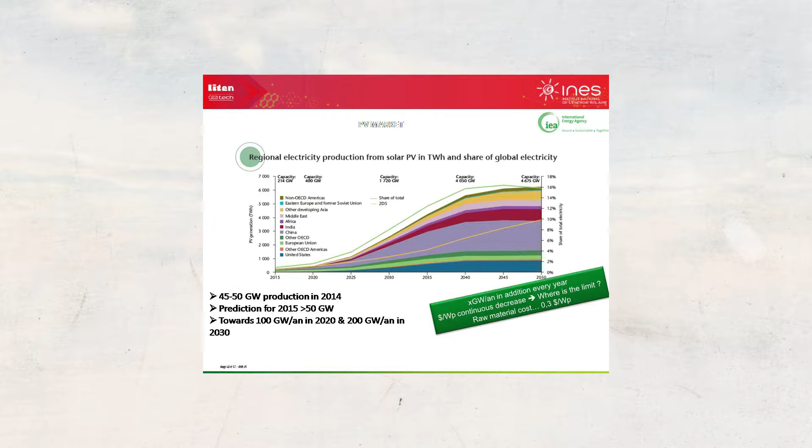So I have also to say that IEA has been so far very pessimistic, always expecting less than what has been achieved really on the field so far. So we have very interesting years in front of us. PV will still increase very much. And it has also been said in the IRENA publication this year.

The Agora and Fraunhofer study show that after PV now has achieved a price in the range of 5 to 6 cents per kilowatt hour, it will be everywhere below 5, and the range for the year 2050 will be 2 to 4 cents per kilowatt hour everywhere in the world. And even the Deutsche Bank is claiming that now it's time to invest there.

So I'm coming from CEA INES. A few slides just to present quickly what we are doing. We are part of a big research organization previously completely involved in nuclear, but 25 years ago they started some research on non-nuclear energy, on technological research, on microelectronics, big data, software, and new technology for energy. And that was the LITEN Institute in which we are working now.

This LITEN Institute is completely dedicated to new technology for energy. We are addressing organic electronics, nanomaterial, biomass, hydrogen, electric transportation, and solar technology. And INES gathers these topics. Here we are 1,000 people working with a budget of 150 million euros.

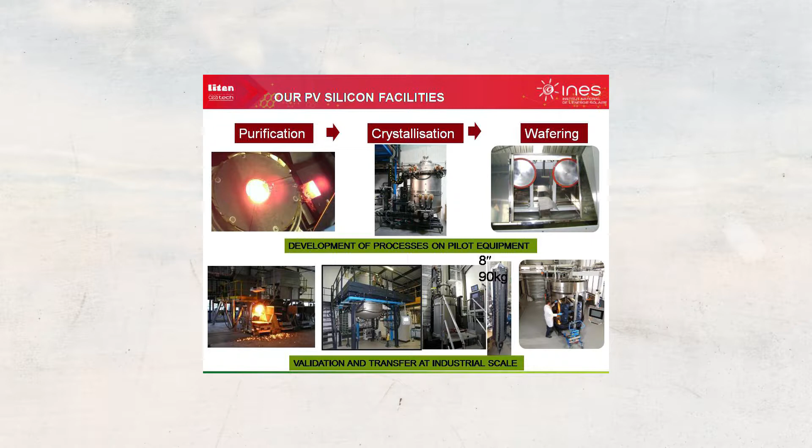You know that multicrystalline silicon is cheap, but is not so efficient. Single crystal Czochralski wafers are highly efficient, are more efficient, but they are also more expensive. And we have been trying over the last 4 or 5 years to develop what we call the mono-like, gathering the advantages of both worlds, of both paths, trying to get at the same time a cheap product and a highly efficient product. And this was developed with the ECM Greentech company.

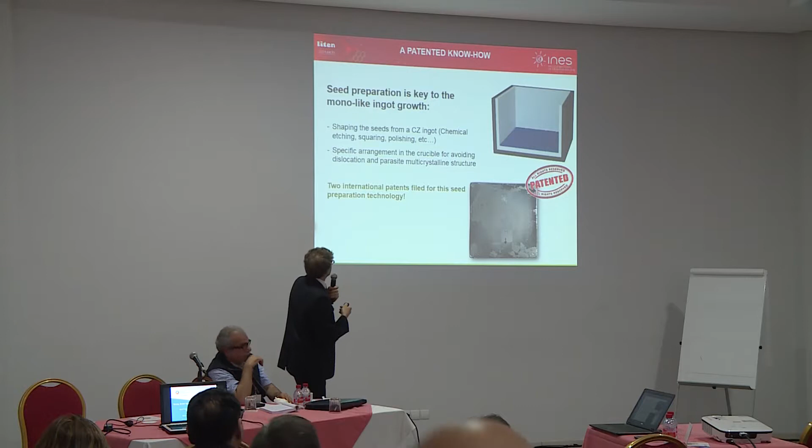And we have been working on all the steps of the process, melting and crystallization. And all this innovation is dealing with the implementation of seeds at the bottom of the crucible. And we have been developing patents on that. And you see, once you grow the silicon, you still see the shape of all the seeds on the front surface of the ingot. So 25 centimeters later, I would say, or higher, you still see all the squares from the seeds that you had at the bottom.

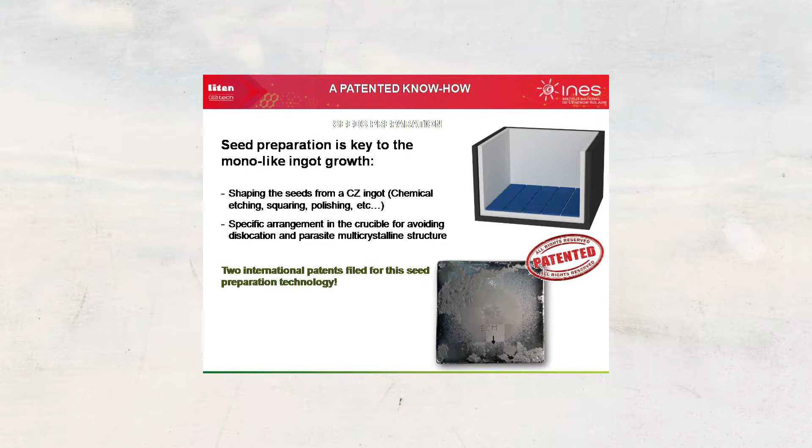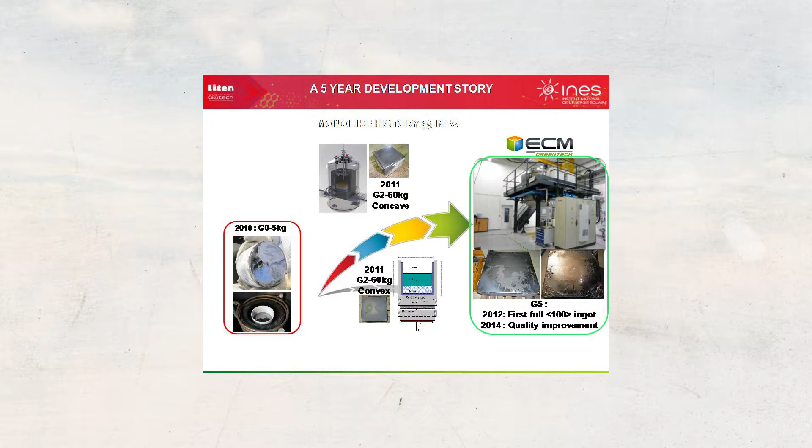For this, we have been working quite a lot. We started on a small size ingot in 2010. Then we reached what we call generation number 2 with 60 kilogram ingot. And then last year, we reached generation 5, and we worked quite a lot on the quality improvement of the material, impurity content, oxygen content, etc.

What is important is to look at the seed preparation. You can start with small seeds from 8 inches Czochralski ingots, or this large, 16 inches Czochralski ingot. For big crucibles, you need only 9 seeds instead of 25 small seeds. Or, that's another way that we are going to develop, is to use a slice of the previous ingot.

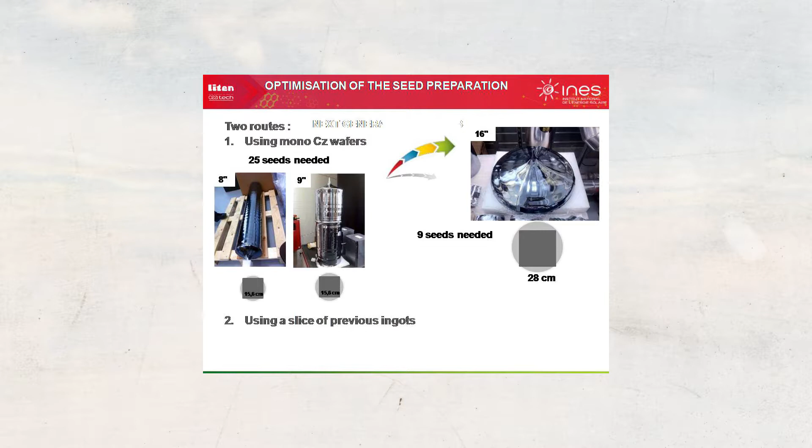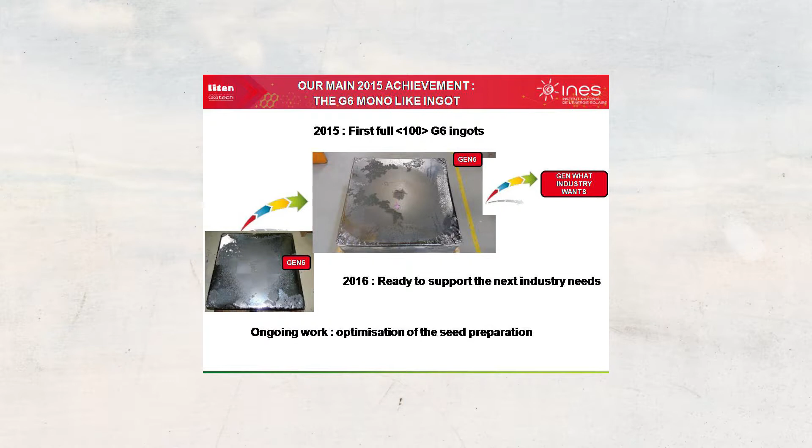And we are ready to go on with generation number 7 or 8. It will be still bigger furnaces and bigger blocks of silicon to always increase the capacity of the equipment. This is the result, and here you may see, it's not so much visible, but you still see the orientation of each of the initial seeds which were put at the bottom.

We also work on getting the wafer, but I will not detail too much. Here we work on the optimization of the diamond shape, which are covering the wire, the diamond wire. And the key issue is to decrease the diameter of the wire, and to optimize the implementation of the diamond, and especially the shape of the diamond and the way to fix them on the wire.

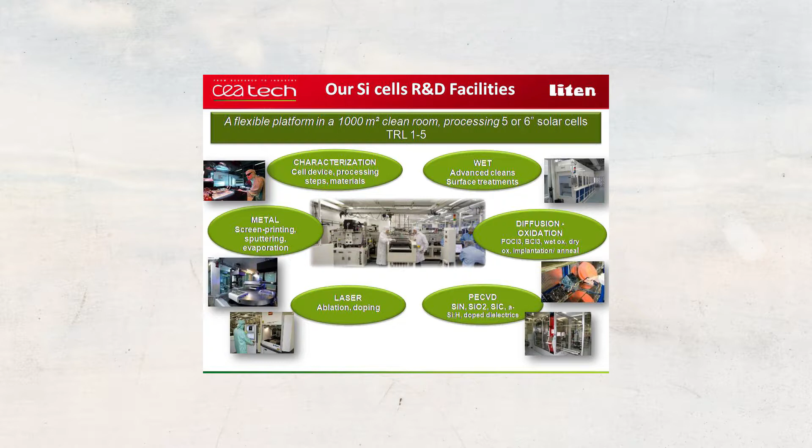At the cell level, what are the advances? Here is a quick description of our facility, of our labs. We have most of the equipment to cover all the processing steps for characterization, etc., diffusion, oxidation, PECVD. We are able to have some laser processing and so on. So this is our clean room for lab development. And here is our pilot line.

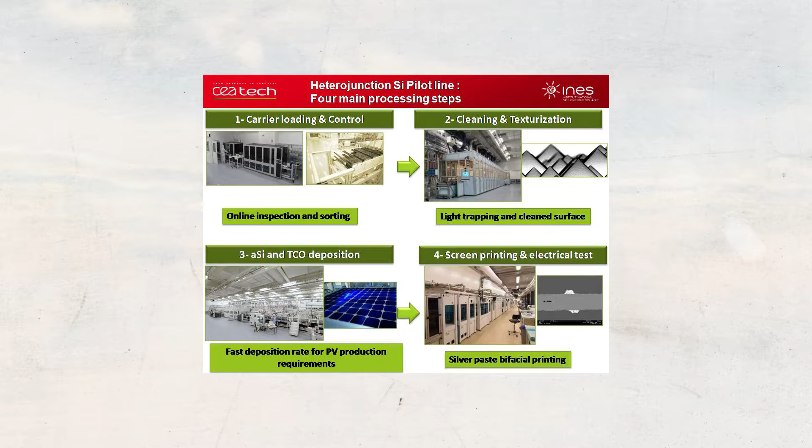It's in another building in which we have a huge pilot line, 80 meters long, to really check all the R&D advances at the pilot line level with a capacity of 1,100 wafers an hour. And on this line, we have all these processing steps. First, the wafer inspection. Second, in some wet benches, cleaning and texturization of the surface. Then the aSi, amorphous silicon and TCO deposition, and then the screen printing.

So what are we achieving with all these facilities? For conventional solar cells, we have the conventional process, aluminum BSF, or the PERC, in which we reach usually 19 to 20%. It's really the baseline process that we use to compare various types of material, various types of solar cells. With the PERC process, which gives bifacial cells, so far we reached 20.3%, trying to go this year towards 21%.

And we work also on the IBC, interdigitated back contact heterojunction solar cells, with which now we can achieve 20%, but you know that some research has been done by Panasonic and Sharp, and we can reach 25% with this process. But we are focusing on how to do the industrialization of this process. The heterojunction, that's our key issue that we are developing. So these are all the processes. I'm not going to detail everything.

Once again, the cleaning, the PECVD deposition of amorphous silicon, the PVD for the TCO, the ITO on the front and the back, and then the screen printing. We are aiming at 24% at the research level. Now, when we go through our industrial pilot line, so far we are above 21% with the busbar, and if we use busbarless cells using the smart wire technology afterwards, we are above 22%. That's the average in production within our pilot line.

And what are the best results we got so far? It's 22.2% on the conventional process, and 22.8% without any silver. Replacing the silver with copper plating, we can reach 22.8%.

Cell is not enough. You need to have some module to protect them. And here, again, we have a full building dedicated to the module design and manufacturing. We have also specific equipment for the cell interconnection, I would say classical, conventional soldering, but also gluing, and all the testing equipment and characterization equipment.

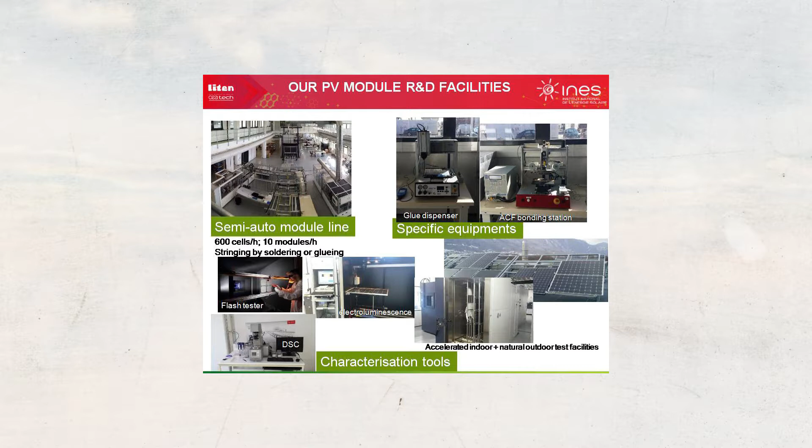Of course, we are not producing conventional PV modules. We are always trying to develop new functionalities or new products, so we can deliver any type of small module with 1 cell, with 4 cells, or of course with 60 cells. But we are mainly using this facility to develop any type of PV module, and it goes from lightweight module, flexible module, bifacial module, using specific material, trying, for instance, to replace glass with other polymeric materials.

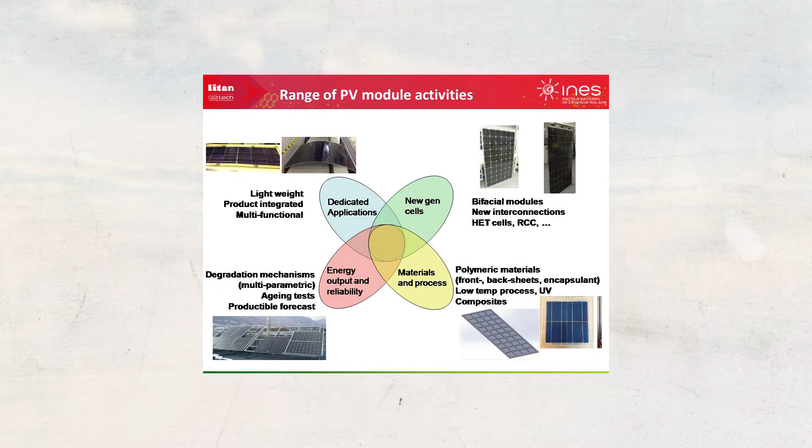We have some basic activity, like understanding all the degradation mechanisms. So this is covering all the activity we are having on PV modules. And these are some examples of what we are delivering. A very lightweight module with polymer injection. In fact, I forgot to say that we are really working hard on decreasing the time for the encapsulation. In a conventional process, you require 15 to 20 minutes for encapsulating a PV module, and we're really aiming at decreasing this time to less than 1 minute with some specific material, of course.

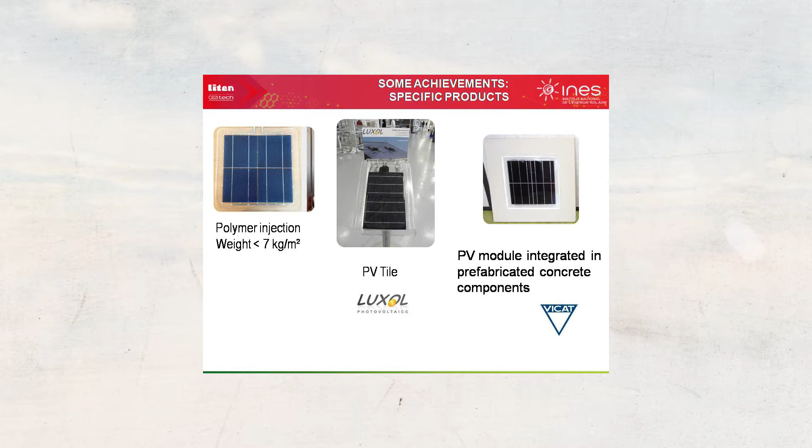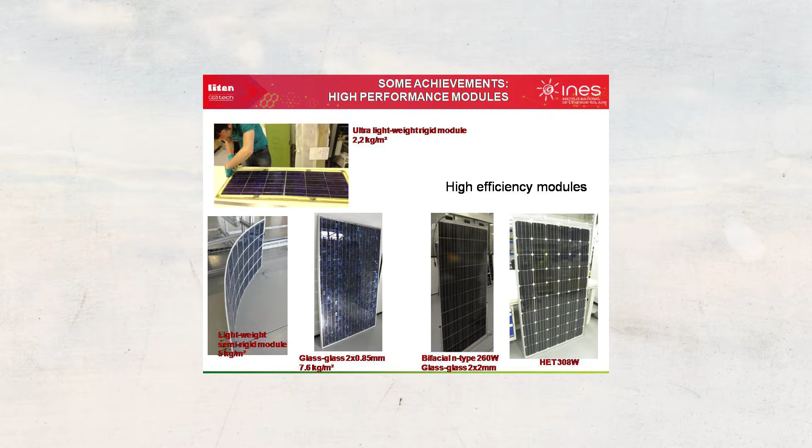We are looking at the integration in PV tiles, in PV prefabricated concrete components for cladding. As an ultra lightweight module, we have reached 2.2, almost 2 kilograms per square meter with a specific material. It could be very useful to refurbish old buildings without having to change or refurbish the structure. So these are some examples of what we are doing, and of course, the one using heterojunction solar cells, which are bifacial glass-glass modules, which give this result.

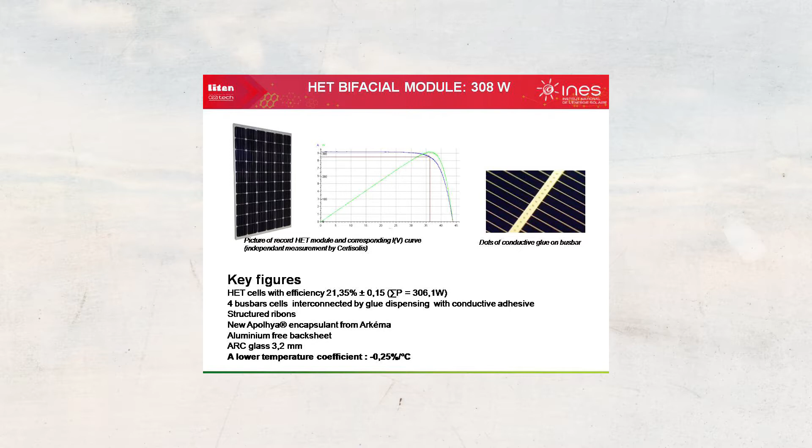What is interesting using heterojunction solar cells is you get a lower temperature coefficient, which means at the same peak power, higher energy output in high temperature regions, which may be interesting, for instance, here. This is what we are looking at. With bifacial PV modules, you see that what is at the bottom, at the back of the PV module is important. Whether it is black or white, you get a different albedo. So usually we can find 15 to 25% gain, more energy output. Of course, it's depending on the way everything is installed.

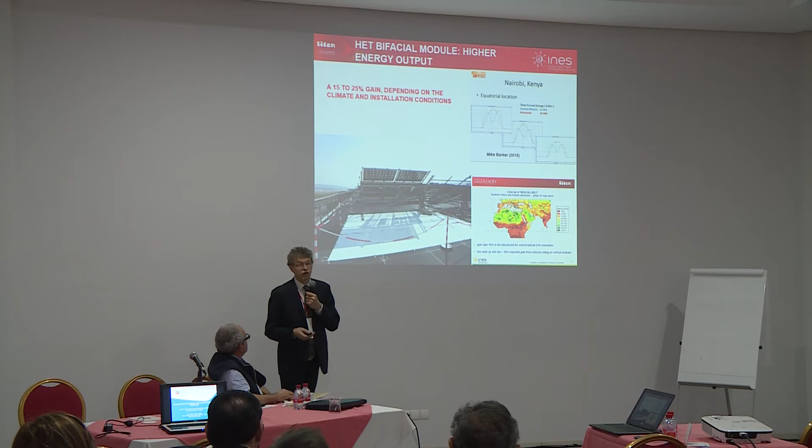And you can also think of new designs of PV installation. You can even put them vertical, north-south, and then instead of the usual shape, you get this shape, almost like a camel instead of a dromedary. And you get, at the end of the day, almost the same amount of energy, not the same shape of production, of course, sometimes less, but sometimes more. And we have performed this study, especially in this region, with modules installed vertical, north-south, so being illuminated mainly in the morning and mainly in the evening. It could be interesting also from the dust point of view.

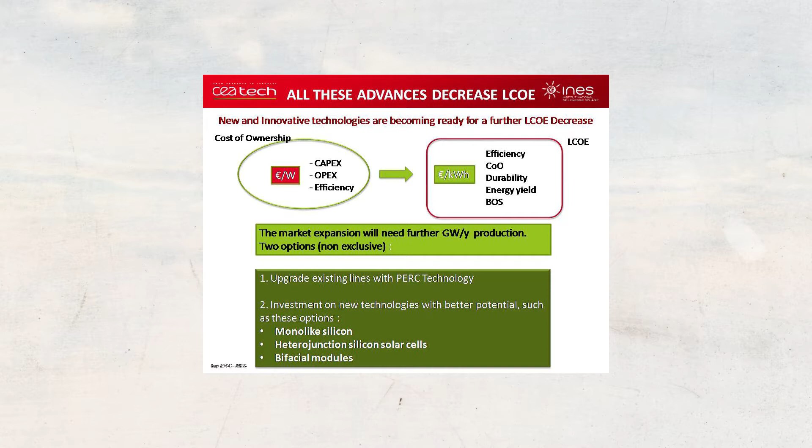So you see all these improvements are all looking at decreasing the LCOE, which is the most important figure. And of course, there are a lot of existing lines being refurbished to go from the aluminum BSF process to the PERC process. But we think that all these advances, which are just on the market now, with monolike silicon, with heterojunction solar cells, and with bifacial modules, are really another way to push forward to decrease again the cost of PV electricity.

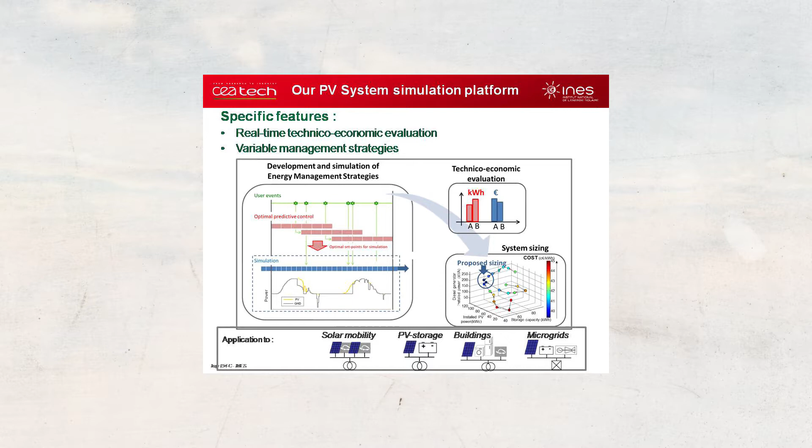And at any time, you have to take the decision: is it better to consume it now, to use it later, to store it, to discharge the storage system? And this, you can decide to do it anytime. So anytime you need to decide what is going to be your strategy for managing the electricity for the next 15 minutes, for the next hour, and what are you planning for the next hours.

So we have been developing this module, and of course it can be applied to solar mobility, to PV storage, to grid-connected PV in small grids or in buildings, in which you can always manage your energy demand. We will see this application a little bit later. For instance, what is important to increase the value, but also to decrease the operating cost of PV plants, is to simplify the troubleshooting.

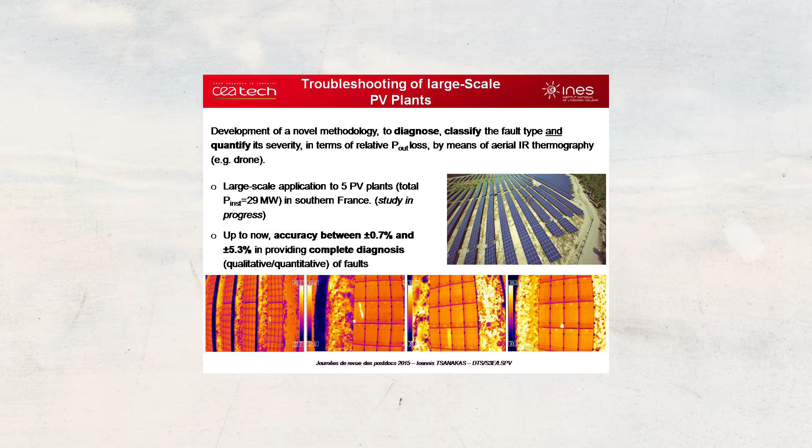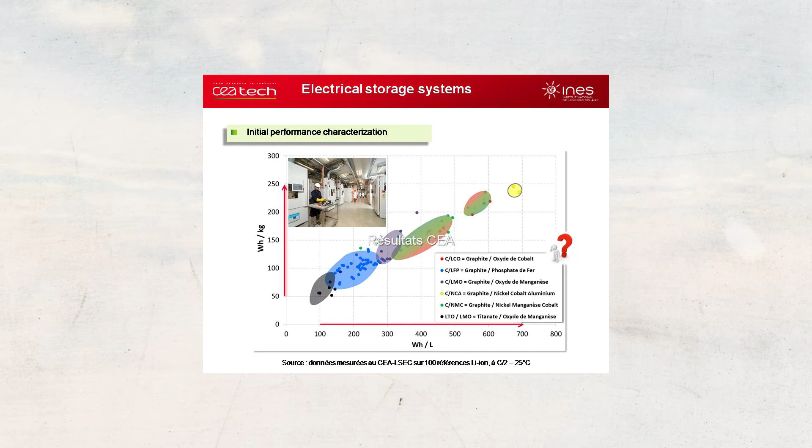Okay, 3 minutes. For storage systems, it's important to select the right technology. We have been comparing many storage technologies, and of course, they are not all behaving the same. Regarding the initial characteristics, the cycling capacity, the calendar aging, you see big differences. These are all lithium-ion batteries, but with different chemistry inside. And it's important to know what we are aiming at.

And if we are doing all this, it is to have at any time a very accurate idea of what is the state of charge, the state of health, and what should be the best managing strategy. So in order to use electricity in your PV system, it's important to know at any time if it's going to cost you to store electricity and then to discharge the storage system. Will it cost you more, or will you gain more by doing this?

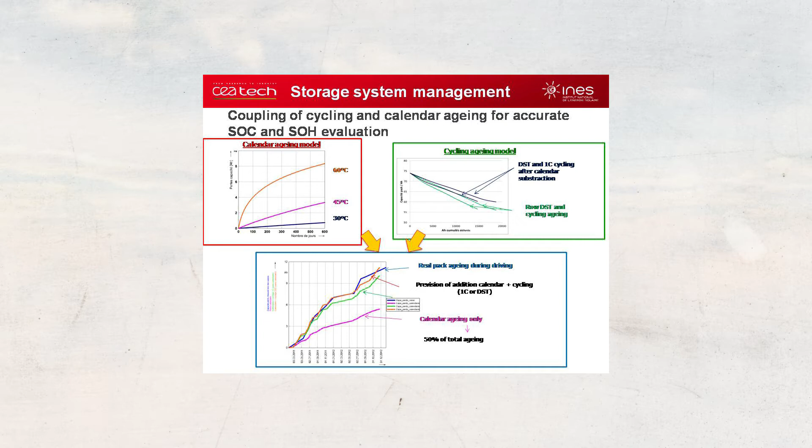At any time, you have to balance to make your decision, whether it is better to sell the electricity, to use it now, or to store, to use your battery. But then you will have a higher value for electricity later. So you have to know a lot about your storage system.

Last application, and a very interesting application, is transportation. So I mean electric vehicles being recharged with PV. And what is important is that one single square meter gives you enough power to drive 1,000 kilometers a year, which means that a parking lot of 15 square meters, 3 by 4, 3 by 5, or 3 by 6, gives you 15 to 18,000 kilometers a year, which is the average use of any car.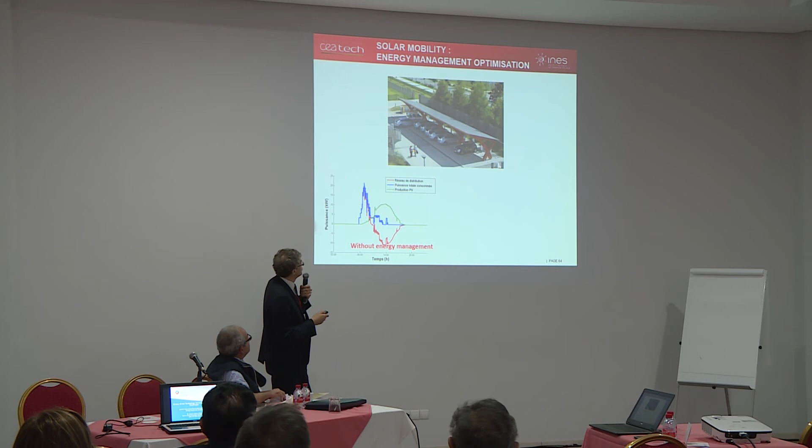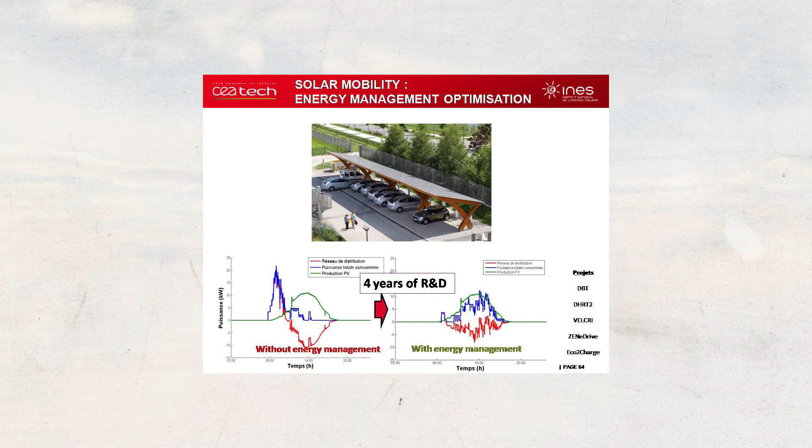And these are figures from Chambéry, France. Here in Morocco, or especially in Marrakesh, it will be around 1,500 kilometers a year per square meter. So this is much more efficient than any biofuel plus conventional car. To do it, we have done this managing strategy. Without managing strategy, when you have 10 cars arriving in the morning, you have a big peak of demand on your network, and it's not so good. But if you manage it well, you can do this.

How? So you have all the cars arriving in the morning which want to be recharged. So you have a use of solar only for a day in which only 20 or 25% of your energy is coming from solar, because the peak of solar is at noon. If you can anticipate and delay the battery recharge, you can reach this solar fraction. We do it like that.

You see all the recharge stations, station 1, station 2, and you will decide this car has to be available at noon or at 1 p.m., so it will be recharged first. But this one is not going to be used before 16, so it will be recharged last. And you can manage your demand like that. You can have many strategies. So for the one to increase the solar fraction, you will do this.

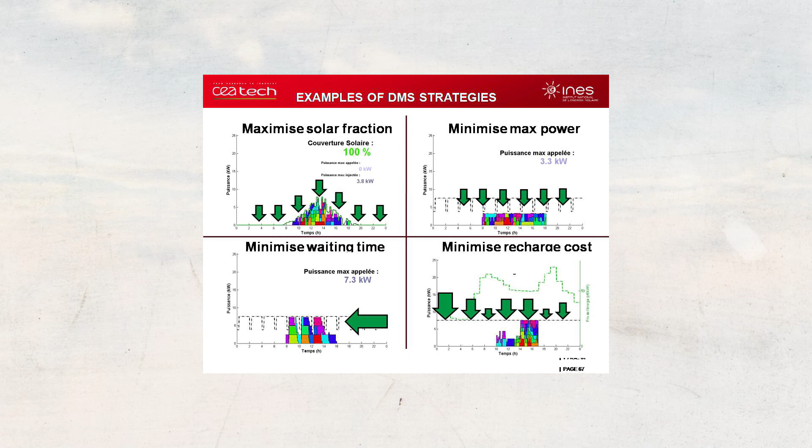You can minimize the max power supplied by the grid, and you will manage it like that. And you can manage it anyway, depending if you have different tariffs on your grid, you manage it in a different way. That's a way of managing electricity. I will skip this last one.

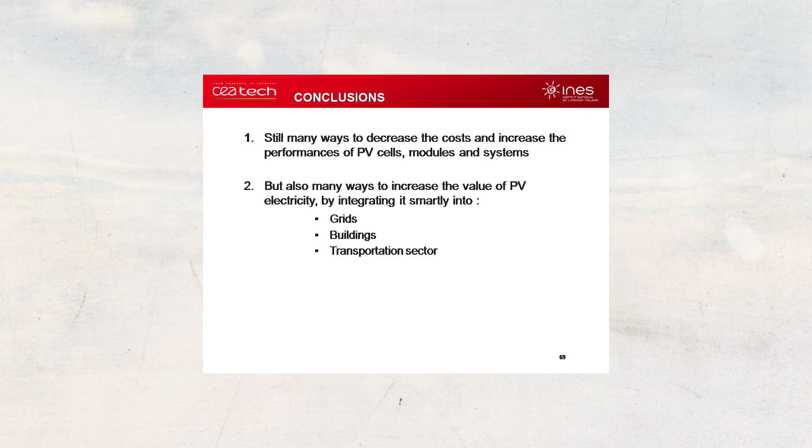So I wanted to conclude on that. We have seen still many ways to decrease cost and increase performance of PV cells, modules, and systems. I've also been showing ways we are addressing in our labs, in our facility, to increase the value of PV. I've shown an example in the transportation sector, but this integration can also be done in the grid, in buildings, to have very efficient energy buildings, through which you really increase the use of solar energy much above this usual 20 or 25%.